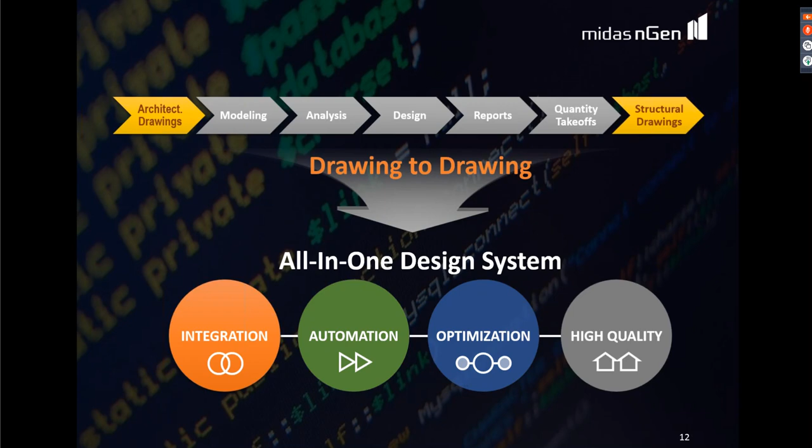Let us look at integration. In terms of integration, modeling, loading, analysis, design, and output are all integrated into one software solution. There is easy and fast CAD-based modeling method. We can have auto generation of specialized loads. There can be multiple analysis cases for a single model file, and multiple design cases can be applied in the single model file. Output generations are in 3 types: Word file, Excel sheet, and DWG file format.

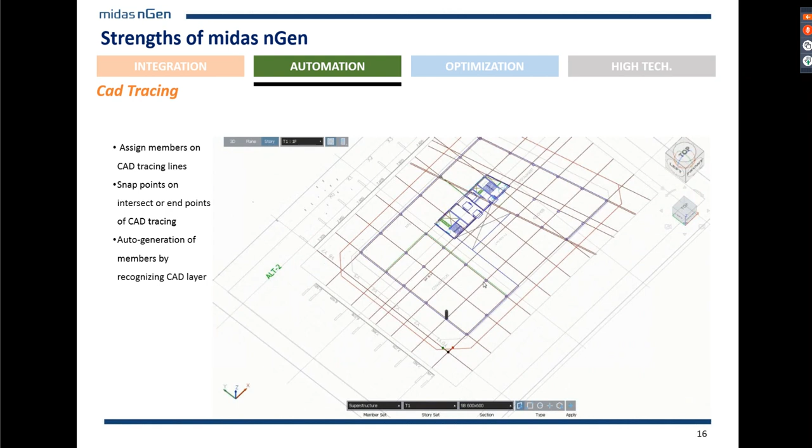Let's look at some automated functions in midas nGen Software Solution, starting with the modeling functions. We have seen this feature yesterday as well, the tracing feature, wherein you do not need to define the section properties of the columns. Just drag around the entire plan and you'll get all the section properties and thicknesses automatically detected by the program.

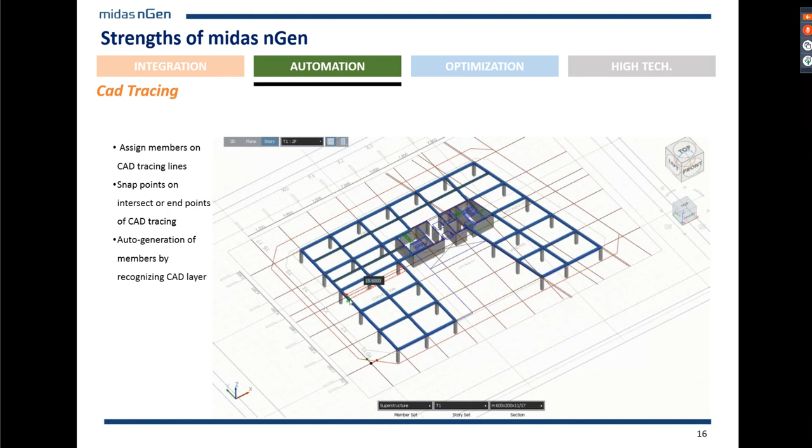You can also use the centerline plan or center lines to locate the beams at a particular story. You can even do easy modeling using coordinates or snapping tools. You can detect the entire floor plan for the slabs, simply select the unrequired slabs and delete them. That's about how you can create your columns, beams, shear walls, and slabs very easily in midas nGen tracing.

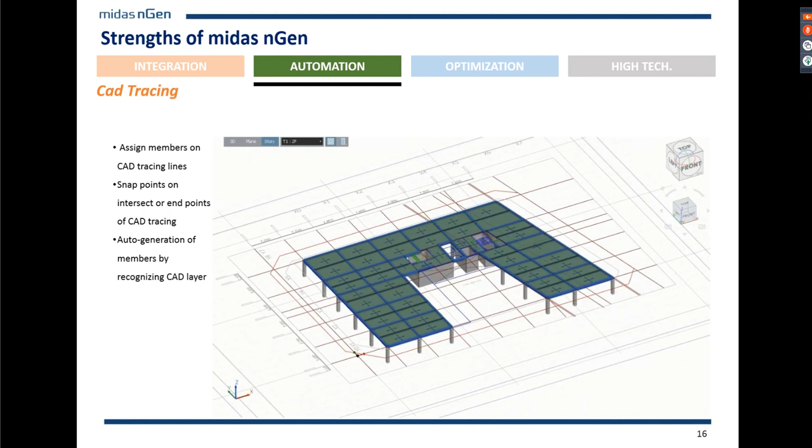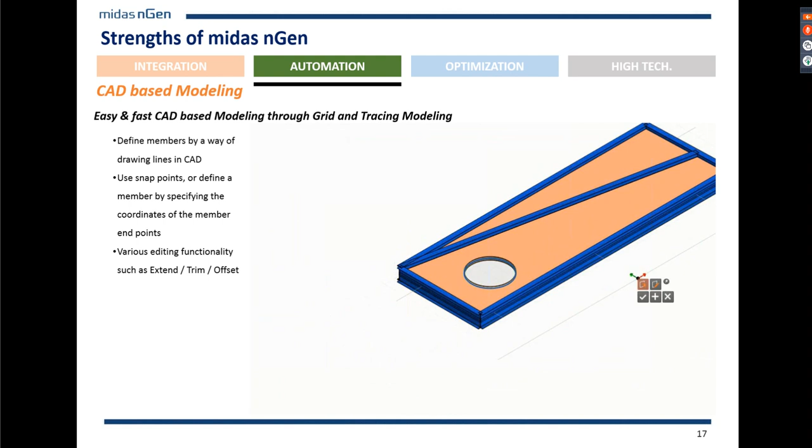There are some editing tools as well available, like you can move very easily, copy, stretch or reduce, extend, trim. You can also have various shapes of openings generated very easily by simply sketching them. You can have irregular shaped bodies modeled very easily using functions like sweep, revolution, or even a trim option.

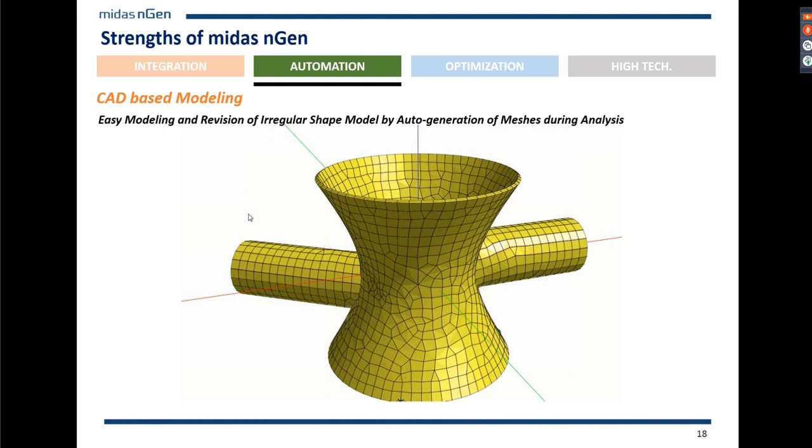In midas nGen, we have an auto mesh feature, so you can actually have any shape or size of meshing as required.

All types of foundations can be modeled in midas nGen software. You can have strip footings below walls, isolated footings. You can also have basement walls and apply earth pressure easily to them. Then footing girders, as in you can assign soil spring supports to the footing girders, like plinth beams and pedestals as well.

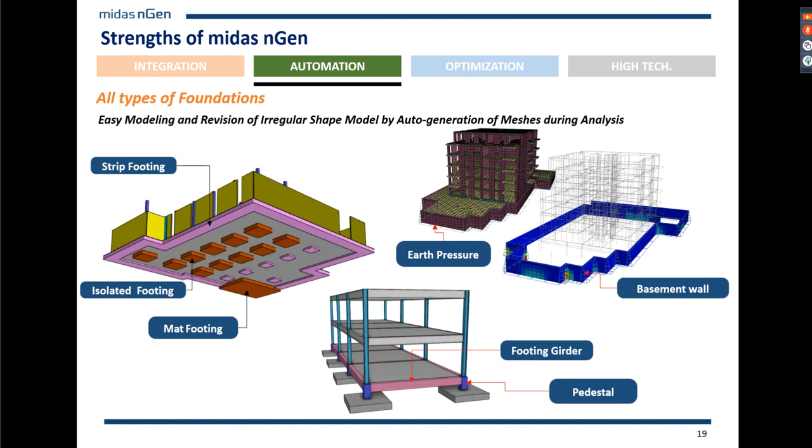You can also have pile supports modeled in midas nGen. And that's about the automation in the modeling part.

So let us start with midas nGen software solution. We'll open midas nGen and look at how we can do the modeling of our steel structure in today's session. I'm going to have a very fast solution over here for drawing the truss, and that's by importing.

We have the import DWG or DXF option, wherein you can import a 3D truss or even a 2D truss. I'm going to import a 3D truss over here. Okay, this comes in fit. All right, and I'll click on OK. So we have a 3D truss modeled over here by simply importing from a DWG file.

Now I'll simply convert this sketch, which I imported from the DXF file, into members. For that, I can go to this body tab and use convert into member. I can select the lines which I want to convert into members. For example, this bottom chord, I can convert it into a beam having section property of C 152x76 by selecting the property.

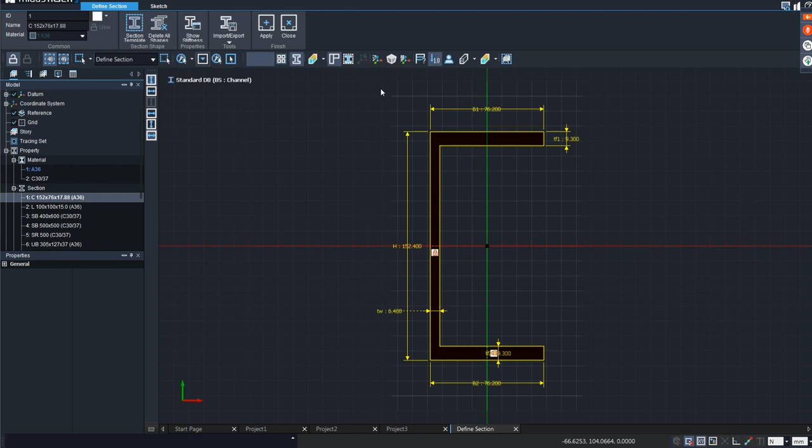So here we're using British Standard, so you can select from here the grade of steel, and you can also edit the section properties. You can say modify and come to a location wherein you can draw any shape of your choice for section properties. So here I have this section property, and if I want, I can just simply select everything and delete.

Then I can go for section template, steel type, and here I can select AISC. We have got several types or shapes available. So if I go for a channel section, I have again a huge database of different types of channel sections or C sections. So I can basically select from here and say insert template. So here I have the template to be inserted, and then I can just say apply and close.

So in this way I can have my section properties modified, and this would be applicable for everything. And you can also add your own section properties. Okay, so that's one part.

Next, I'll also go ahead and use some polygonal selection type, so that I can select my members, my line elements, easily to convert them into members. I can select the type of the property. Then I can also have brace type of members generated, let's say angle section. So I'll use again a pick selection, make a box, and make the selection easily and click on apply. So this is how we can actually create the entire model.

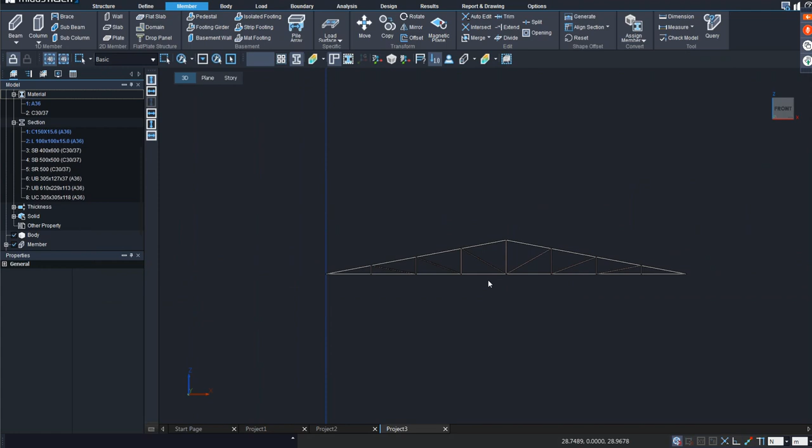Okay, just let me check with the dimensions while importing if I've correctly done that. It's 8 meters, seems to be too big. That says 64 meters. Okay, let me just undo this import. Sorry. We have several importing functions as well available. Okay, this seems to be fine.

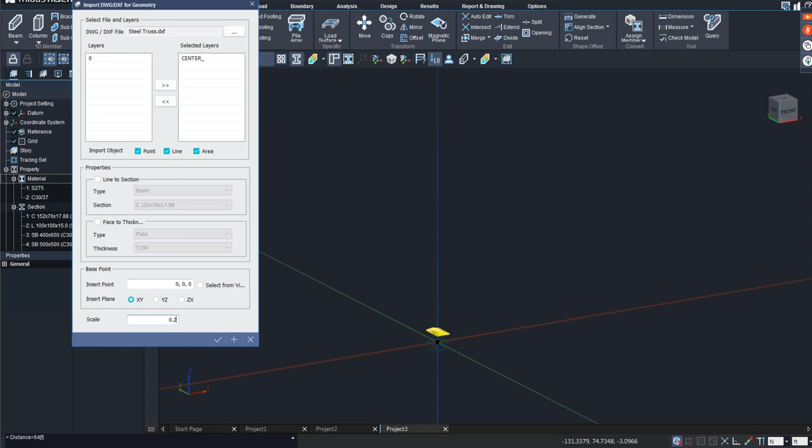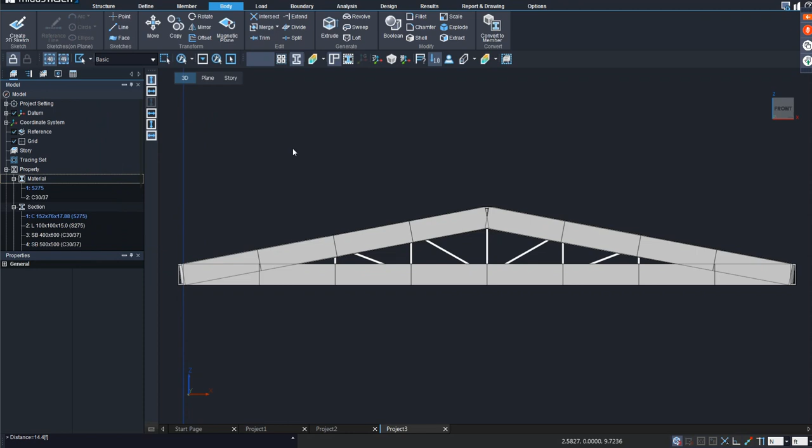No. I'll make it smaller. Okay, 14.4 meters. All right, so I'll go ahead and convert these body elements into members. Let me do that. I'll select everything at once to make it quick. Yeah, C section. Oh, sorry. 64 feet was fine.

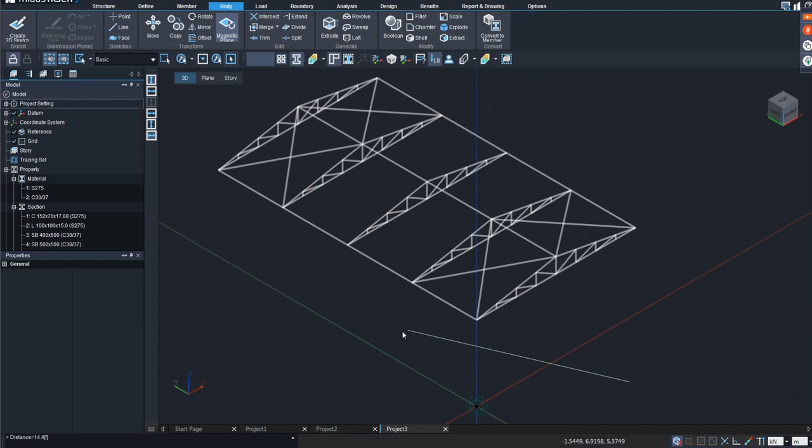Sorry, I got confused with the feet and meters. I'll just start all over again. Sorry for that. Okay, so this is supposed to be one time itself. This is correct. Get it back to meters for no more confusion. Okay, so the unit system can be modified at any point of time. I'll go ahead with the selection.

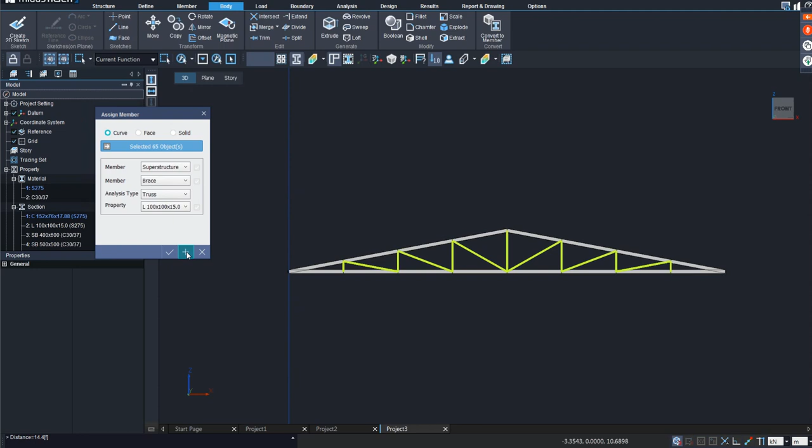And angle section for the braces. This is how the color difference would be if we choose the correct type of members.

So that's one thing. Now, one more thing is that even these would be our trusses, so you can actually select these. These are converted into members, or these are lines itself, so you can convert them as well into braces. Select the brace like this and click on apply. This is done.

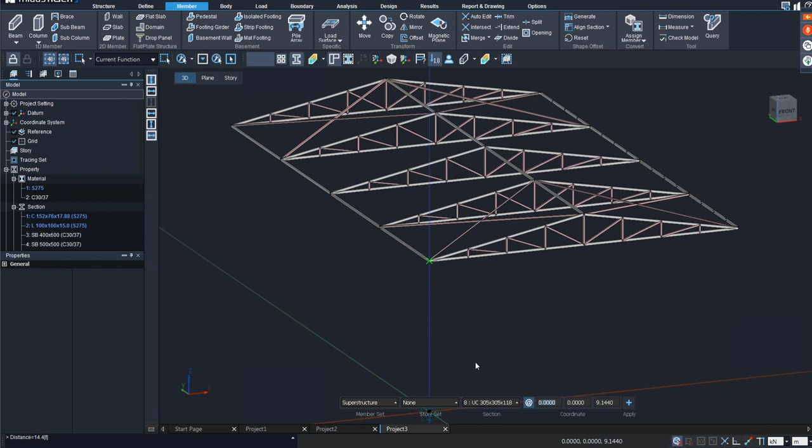Then we will go ahead to draw our column members below this, and it's easy. Just click on column over here. It's like CAD type of modeling itself. You can select the section property and can draw it by clicking. I'll make it using F8 to make it straight, and I'll click over here.

And further we can go ahead, copy this element or member into a direction. You can even click by 2 points wherever you want.

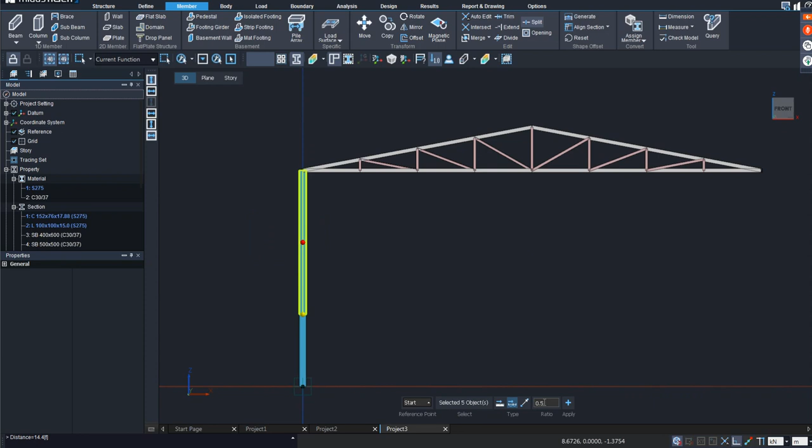Then further, let's look at some more editing tools, like I would like to divide this into parts. I can split these members into parts by ratio, by 2 points, or by distance. There are different options available. I'll go ahead with by ratio, and have 1/3 division of this member. And I'll select this and have 0.5, or half of it will be divided again.

And further, I can go ahead create my beams. For the beams, I'll select the section, let's say UC 305 by 305. Just like we have in AutoCAD, we can snap on to the ends, to the nearest point, to the center, and so on. And further, I've got some truss members as well.

So I'll go ahead using the brace type of member. Here we have got several types of analysis types of members, like elements. So for brace type of design, we can have beam type of element as well, or compression only, tension only type of elements are also available, and truss type of element is also available.

So we can choose, and we can choose a section property, and I'm going to create some truss members over here.

I think my intersect command was not on from here, that's why it did not get intersected. No worries, we can still go ahead and use this intersect command, and we can select all of this and click on apply.

I'll get back to my braces so that my center point will be located nicely. Right, so here it is. So you can just go on drawing easily. If any incorrect location is selected, you can press undo. There is a right click command also to come out of the command line, and so on.

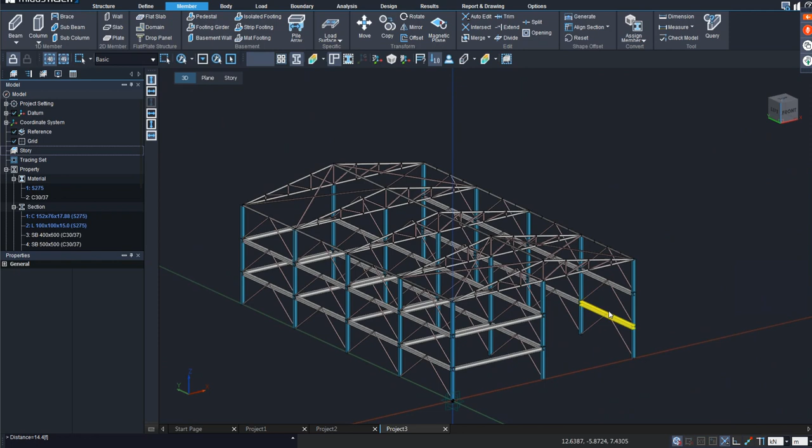And further, if we have got the slabs at these locations, you can actually use the option. I'll save this project. So you can click on the periphery elements, and you can see the slabs over here, and you can actually click on apply. So you've got your slabs also generated.

You can also create your roofing elements at the top if you want. If you don't want, you can actually use your floor loads command to apply the loads on the beams. You can model the purlins if you want to, that's also an option available. So here I'm going to show the floor load command as well.

For that, we'll move ahead to the loadings now. And in the loadings, we'll go with the self weight firstly, and then we will go ahead with certain more options. We have got point load, beam load, pressure load option, temperature can be applied to the structure, displacement, arbitrary loads. These options we also saw yesterday, and we also tried to apply slab load onto the locations where there are slabs. So same thing can be done over here.

We can apply the slab load type, live load and dead load at once. So let's assume this is an industrial shed, and there is a higher floor finish of maybe 3 kilonewton per meter square, and a live load of, let's say, 2.5 kilonewton per meter square. Of course, it will vary as per the requirements.

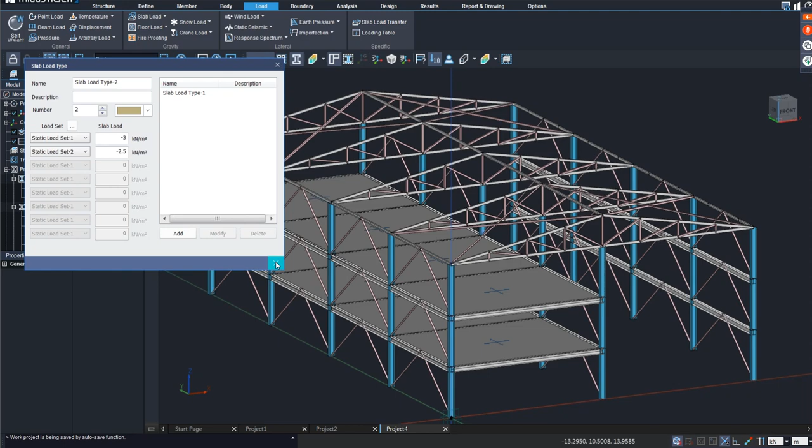I'll apply the slab loading on the slabs. I can simply do the selection this way and apply. So slab loads have got applied. Now we can apply the floor loads.

We'll go to the floor load type and assign roof loading. You can give a name like roof, and provide the loading information like the purlin, and also specify the weight of the purlin and the roofing. Let's say 0.5, and some static load or live load. If there is going to be any live load on the roof, that also can be specified. Important part is to provide a negative sign. So likewise, you can specify the weight, and then start the loading.

So here we have the load command. We can go for the one-way type, and to include the purlins, we have got the option. Just let me apply the floor load first and add the locations.

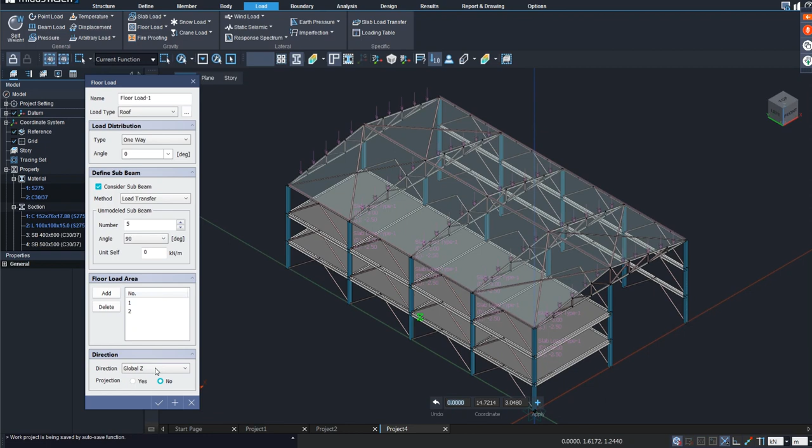You can go for a 90-degree angle or a 0-degree angle. I'm going for 90-degree because this is how I want the purlins to apply the load on these top chords. The same thing I'll do for the other side. I'll start from the smaller direction and then the longer side, and click on apply. So I've got both areas on which I want the roof loading applied, and then I'll click OK. Roof loading has got applied, and the purlin point loads are also considered on the top chord beam members of the roof.

So that's about the loading. I'm sorry, I think I missed one modeling part, the pedestals and isolated footing. So foundation is not modeled yet. Let me go back to the member and show you how we can easily model pedestals and footing girders, and we have isolated footings as well. We'll see all these three options.

When it comes to pedestals, you can specify the height of the pedestal - 1 meter, 1.5 meter, or anyhow - and the section size. All you have to do is simply select the columns below which the pedestals are to be created. So you can see these are the pedestals. I'll click on apply, and we have got our pedestals generated.

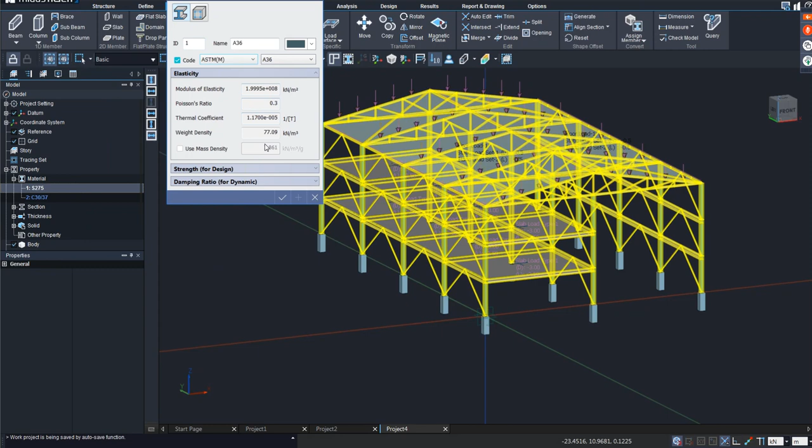Below the pedestals, we can go ahead and have isolated footings in the same way. Here you can specify the thickness - I'll add a thickness of, okay, we'll change the grade of concrete. Thickness is 0.5, let's say. Click OK. Let's change the material properties by simply modifying it. I'll use British Standard A36, for example, and British Standard for Concrete, let's say grade C3500.

So this is what I've done, and I'm creating my isolated footings with a thickness of T500, and we have different analysis methods for the isolated foundation - rigid method or FEA method. Both methods are applicable here. Now I'm selecting the FEA method for now, and we will select these pedestals below which we want our isolated footings. I need to specify the length and breadth, and then we can just click on apply. So we have got our pedestals, isolated footings, and footing girders also we can have.

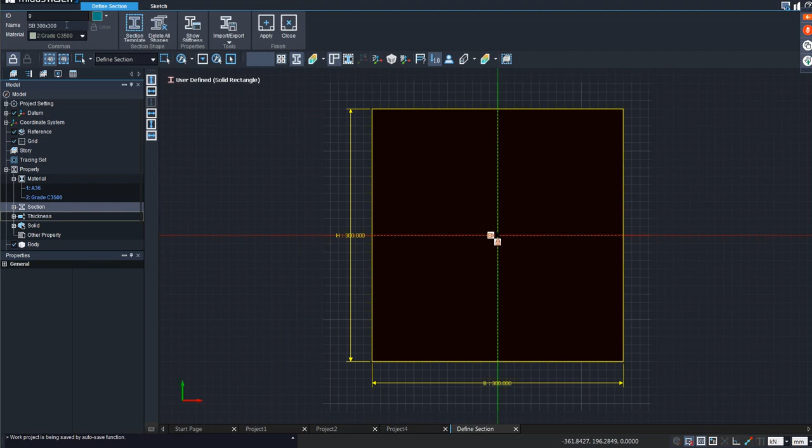Let me add a section property for the footing girder. I'm adding a simple section property of 300 by 300 for the footing girder, and I'll just click apply and close, and then go ahead to do the footing girder modeling.

So here I can select the section property I just created, and we can just go ahead and select the two locations between which we want our footing girder. So it's like a combined footing you can have for this type of member - footing girder, or maybe if you use it for plinth beams, you can use it for plinth beams as well. So I'm using it for footing girder itself, and then I'll click.

I mean, height starts from the bottom. So it starts from the bottom. If you want to move it up, you can - there are options available. I'll keep the height as the bottom itself where our isolated footing is. So these are different options available.

So I'll click on apply over here, and you can see this is how it will look like. Okay, so the same thing can be applied at all these locations. So I'll be definitely providing this information one by one. We can also do it for the last and the first, and then we can see how we can create the intersect command for dividing the beams into several parts.

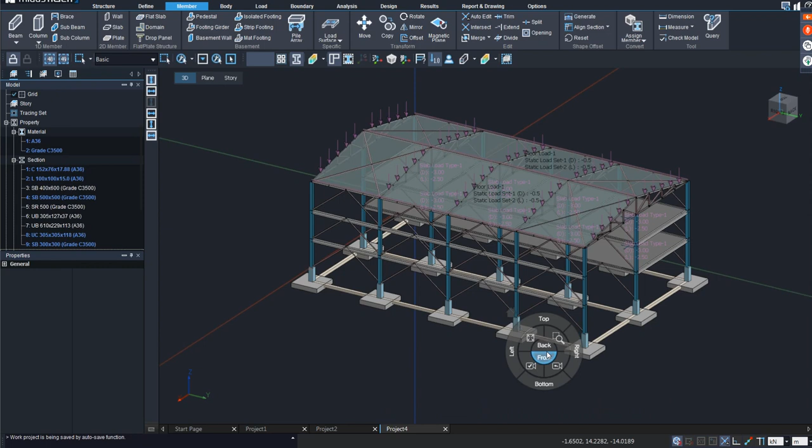So I'll just select it like this, and then I'll intersect later on. Okay, and the same thing can be applied. Okay, I'll use my intersect command over here right now. So we have intersect, select all of this and apply. So we have successfully intersected our beams. So basically you can choose to create different types of members for the steel project.

Okay, so after this is done, we will go ahead now to the boundary conditions for our footings, and we will provide the soil support. So here I'll be assigning soil support information. Yeah, soil support information. So we have got user-defined type of soil spring property definition, or you can have usage of Joseph E. Bowles.

So you can use Joseph E. Bowles as well. And then you can use either linear elastic or compression only type - those options are also available. If you're using Joseph E. Bowles, you have over here the options to select the soil stress, provide the soil stress information, the allowable one. So I'll provide over here, let's say, 200 kilonewton per meter square. And then...

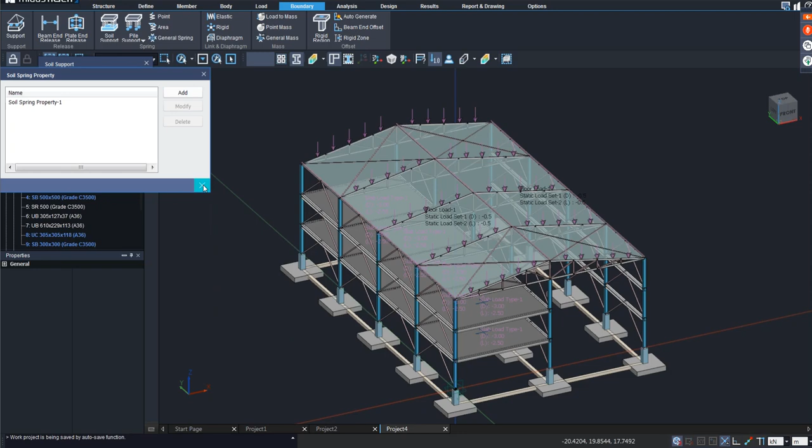So I'll click on OK and close, and I'll select all my isolated footings, and I'll click on OK. So I've applied the soil spring supports to the foundation, and now we can move ahead to the next part, that is the analysis.

Now before I move ahead with the analysis, let me generate some story data information so that we will get our drawings generated. So I'll have this automatic generation of story data, and I'll click on OK over here. So we have got the story data information.

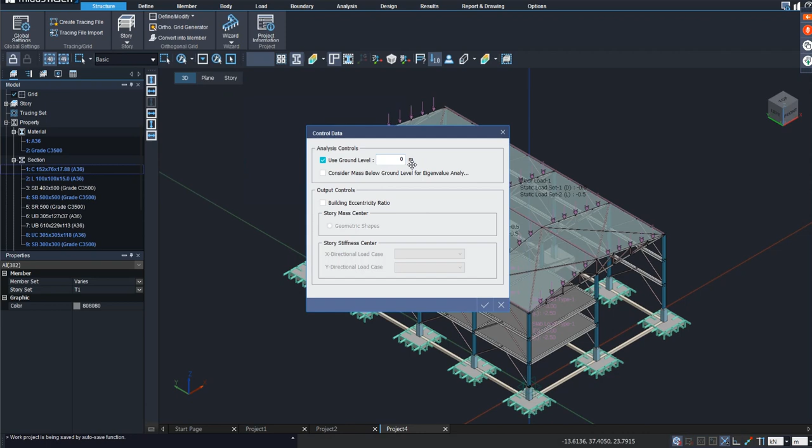Automatically it has detected the basement or the foundation information. So from 0 level to minus 1.5 level, it is B1F and B2F likewise. Okay, so that's how we can understand. If we want the program to utilize the control data as the ground level, basically, as we want, let's say 0 is exactly the ground level, and then we can go ahead with the auto generation of story data and click on OK. So likewise it will again detect if at all you have not used 0 as your ground F level, then you can use any other level as your ground level.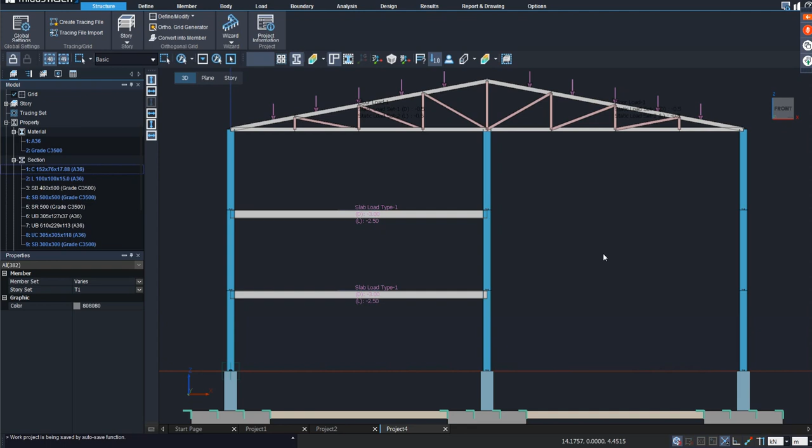Okay, now there's several story definitions that it has detected. So instead of all the definitions, we can choose a few, because it has detected the locations for these points as well - the locations where these points are there. So it has detected those levels as well.

So instead of having those points, I'll display the levels over here. Go back to story definition, and let's say from 3F to between the 3F and roof, I don't want the levels, so I can select these levels and delete that data information only. Okay, so now I have only this much information. Okay, we can also extract grid lines out of our structures. So we have auto grid generator wherein I can just simply click on extract, and we can find out what are the levels of the grid lines. This could be useful for the drawing generation as well.

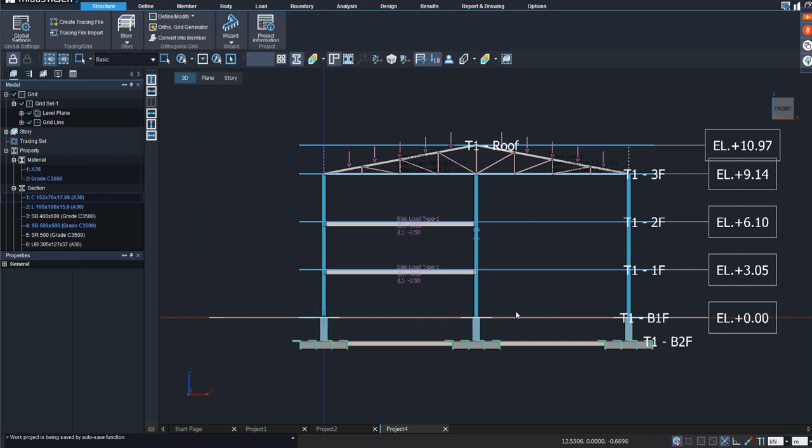Okay, so this is done. Now I'll go ahead for the analysis. In the analysis settings, we have got again the option to choose the meshing and the solver. Combinations, we can choose the steel combination as per the American standard.

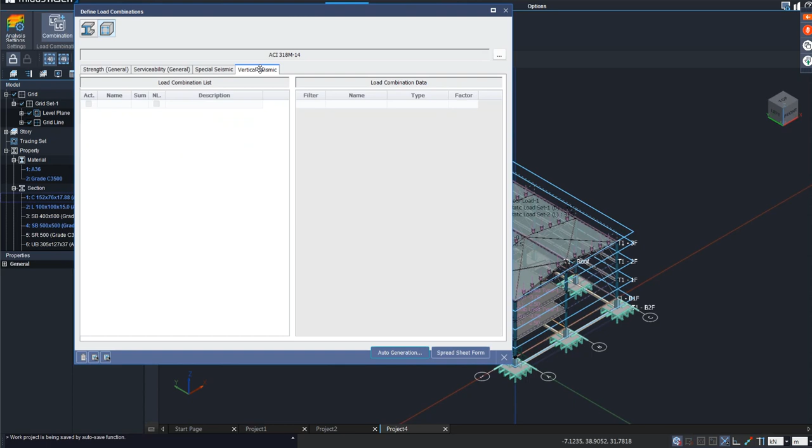So let me select the American standard over here for general, and steel and RC American standard would be used. And we can automatically generate the load combinations, so I'll add that for the steel as well as for the concrete. We can also have our own load combinations, not automatically, as we can manually create our own load combinations. Let's close this. Load combinations are done.

Then further, we have the option to generate the analysis case for design for the superstructure and basement at once, or we can choose separately. And we can choose which boundary conditions we want to utilize, and then the loads that we want to use for the analysis purpose. After the analysis case is defined, we can go ahead for running the analysis. So I'll just run the analysis right now.

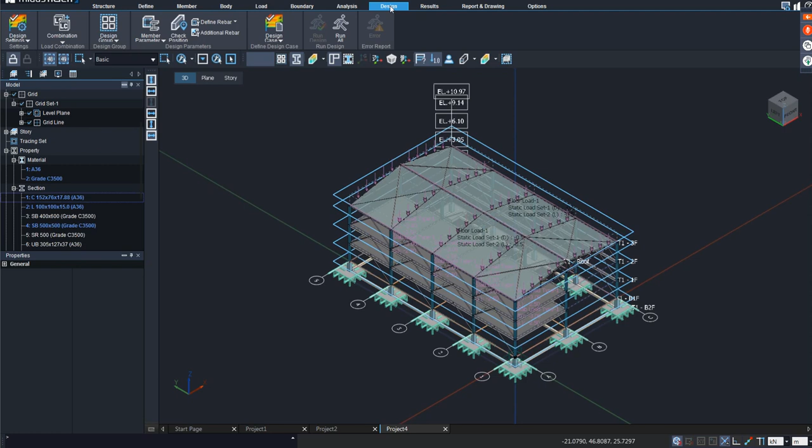Then we can move ahead for the design part. Okay, so before we move ahead for the design part, there were locations where auto constraint was applied. There is a warning over here: one or more non-zero degrees of freedom were auto constrained. So some options were automatically constrained over here.

So we need not worry about that because some elements which were not compatible with the other elements. For example, the 2D elements and the 1D element, if they are not compatible, then the program automatically constrains that degree of freedom. Okay, so that's the warning, and now we can move ahead for the design part.

But before we go to the design, let me show about the results which we can get from here. So we can look at the displacement. Let me hide all the labels, grid lines, and datum tool as well, and we can hide the one way, two way. Okay, so we have our displacement that is displayed right over here.

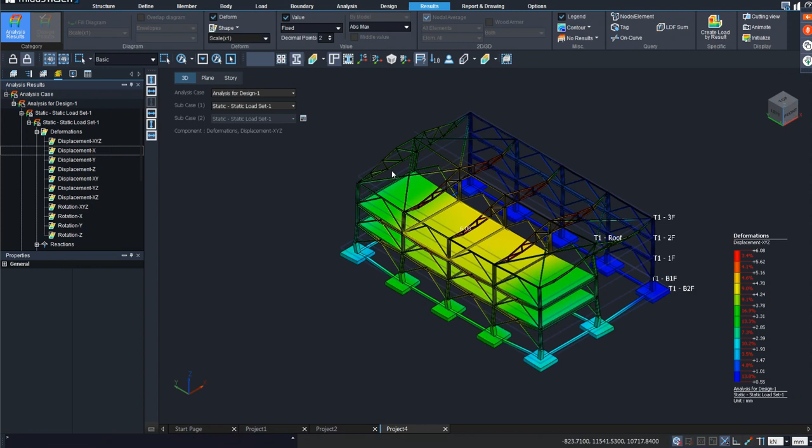We can look at the maximum value. I'll change the unit system to mm. So maximum is 6.08 mm. Then further we can look at the reactions, but these would be at the nodes of our meshed isolated footings.

Okay, let's look at the applied forces. Now, if you're going to be analyzing and designing the foundation separately, then you need the applied forces. So we can actually look at the applied forces at different nodes. I'll undeform this. Okay, so applied forces we can find.

So you can see over here there are some applied forces you can actually take out as a table, and you can use it, or you can even use this create load by results. So it converts the analysis result value into loads, and then you can utilize it for performing the analysis and design separately of the foundation. Okay, so that's about applied forces.

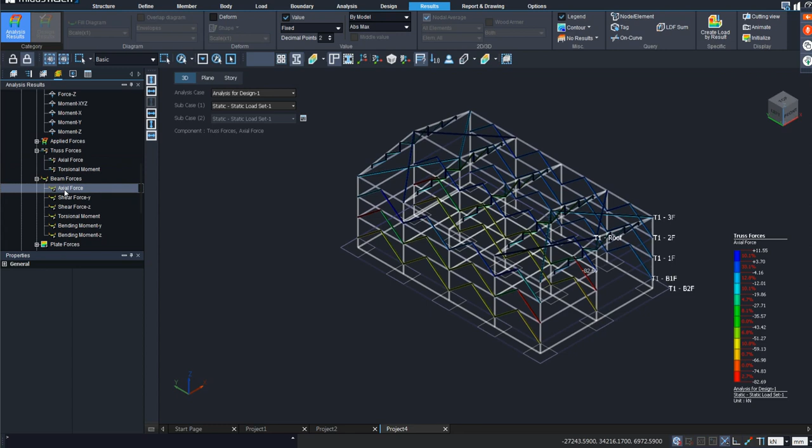Then for truss members, we can see the truss axial force, torsional moment if there is any, then axial force basically for our truss members. We can see that over here. And further for beam forces and moments, again, the axial forces predominantly for the columns. And we can look at the bending moments as well, so we have this bending moment diagram for our column, for our beams and columns both.

You can choose to view the results by plane or by story. So both options are available. So that's one part. Now I'll move back to the 3D and we'll see everything over here. That's about the beam forces and moments.

And wherever there are plate elements like our isolated footings, because we use finite element analysis method for the isolated footings, we can see the actual forces and so on. And after that, we can see over here the pressure value as well, so pressure Z value, we'll change the unit system to Newton mm, kilonewton meter.

Yeah, so it's 88.46 is the maximum one for only the self-weight. But if we go for the combination, then we can see the results. It's 123.85 for the first load combination. So that's about the subgrade stress, I mean the pressure.

And then further, we can look at the plate stresses, beam stresses, truss stresses, forces, beam forces, and so on. So that's what we saw in the form of image or display on the workspace. We can also get all these results in the form of tables. We also have got story irregularity tables available, like story drift, story displacement, story shear force coefficient, and stability coefficient. There is stiffness irregularity checks and so on. So all these tables are available in Midas nGen software. Now we will move ahead to the design part.

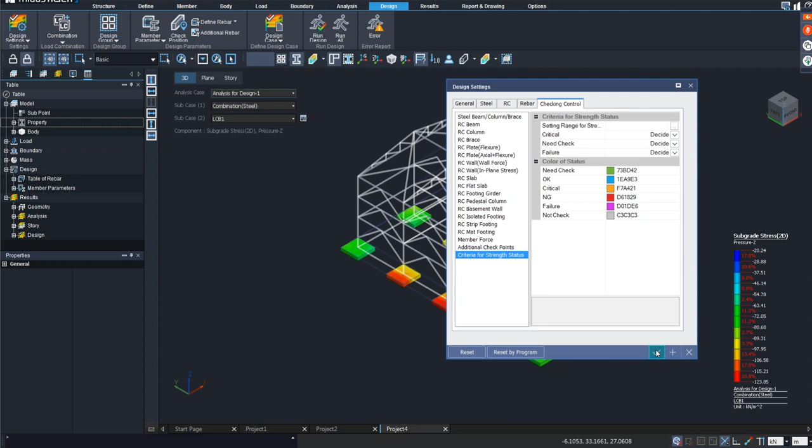That's about how the design settings can be controlled. Combinations already created, and design groups - sorry, not load groups, design groups - would also be automatically generated by the program.

Let me show this. Basically we are taking care of the floor levels, the section shapes, section sizes, and the lengths as well. So all these groups are created.

You can also manually create your own group. Then further, there are some specialized member parameters wherein you can select which all members shall have certain effective length, unbraced length, and so on. You can specify that manually.

When it comes to RC structures, you can actually provide your own reinforcement arrangement. Let me initialize the structure and hide the labels. And further, we'll create a design case.

We can have multiple design cases generated, and those will include both steel and RC. So at the same time, I can run both steel and RC. For RC, I can choose rebar auto arrangement, and I can choose the different diameters of bars that it should select for the design. So I'm going to perform the design right now.

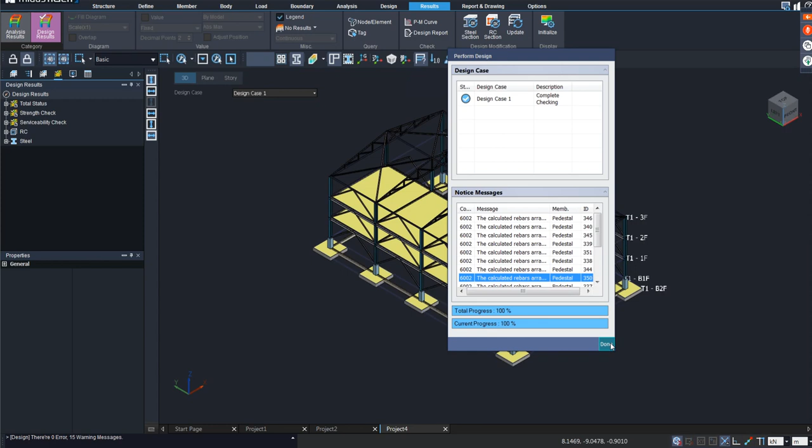The reinforcement requirement is pretty less supposedly, and it is for the pedestal type of members. So you can actually choose to assign your own reinforcements to satisfy this minimum rebar criteria. Okay, so this is one part.

We can actually see the information about our pedestals from here. So this is our pedestal, and the status is okay - I mean it is passing, no problem, but the rebar ratio is not satisfied yet. So we need to actually take care of that part.

Maybe minimum required spacing and minimum required reinforcement shall be applied to the pedestals. You can do the modification over here, and you can go ahead with the design and check. So that's about the pedestals.

Let's go ahead to the total status check - strength check, not the strength, the total status. Basically, it will show if any member is passing or failing in either strength or serviceability conditions.

So we can see that there are some members which need check, meaning they are highly uneconomical. Blue colors indicate that those members are economical within the specified demand capacity ratio limits. Then there are some critical isolated footings which are orange in color, and some trusses which are also orange.

We can see that there are some members which have failed. Some isolated footings and footing girders are also failed, and we can find out the reason for these failures. One way is by going to the steel section and understanding from here why certain members are failing.

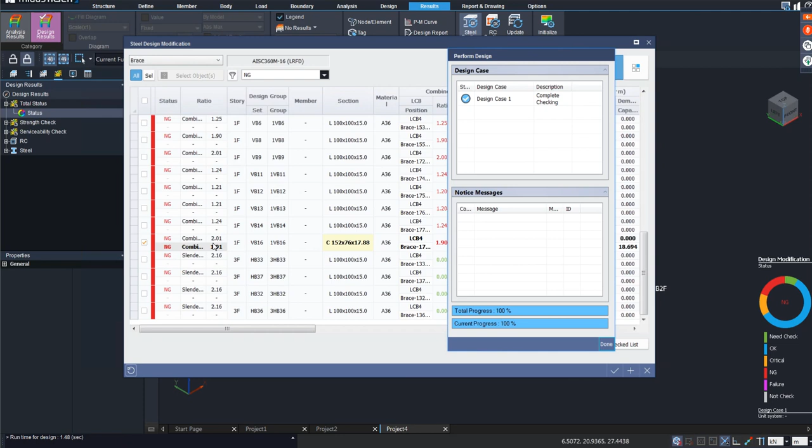Let's say I'm making an example by selecting a C section over here. If you select another section property and run this redesign for checked list criteria, you can see that the ratio has reduced a little bit, but it has not satisfied completely. So these are different ways in which you can check for different section sizes.

After you're done with the modification of your design, you can click update so that the reinforcement arrangement or section sizes for the entire structure will get modified. Then you can go ahead and run the analysis and design again.

One more result I would like to show is how we can get the report generated. We have our beams, truss members, column members, pedestal, isolated footing, and also footing girder. You can select all these and get a summary report - it's a Word file report generated by the program.

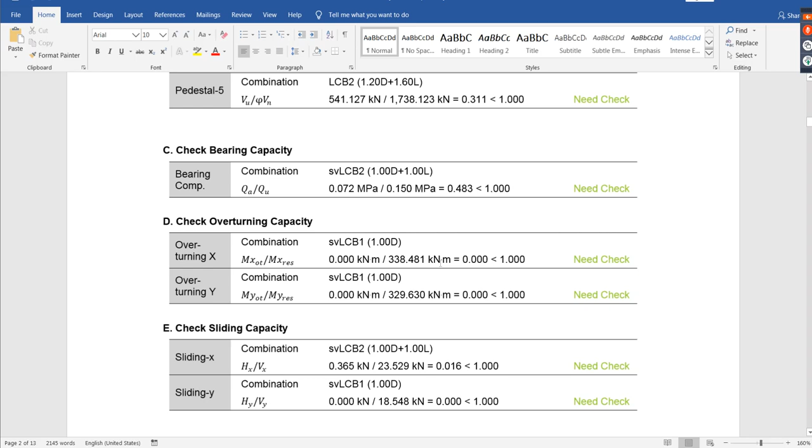This is for the isolated footing. We will be able to see that the program has checked for the two-way shear capacity as well as overturning capacity and sliding capacity.

This is for our footing girder. It has checked and is failing in shear - the particular selected member was failing in shear.

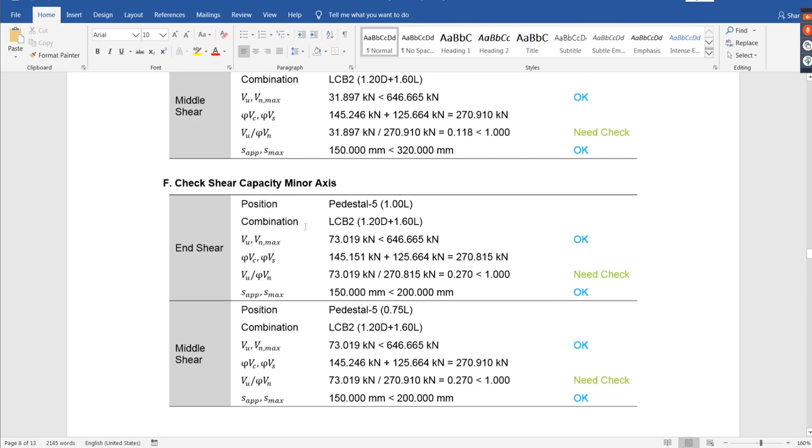This was for the pedestal, and pedestals are passing. Then we have the steel beam member, and we'll be able to get this information - slenderness ratio check would be done, shear capacity, deflection check, and fatigue check is given.

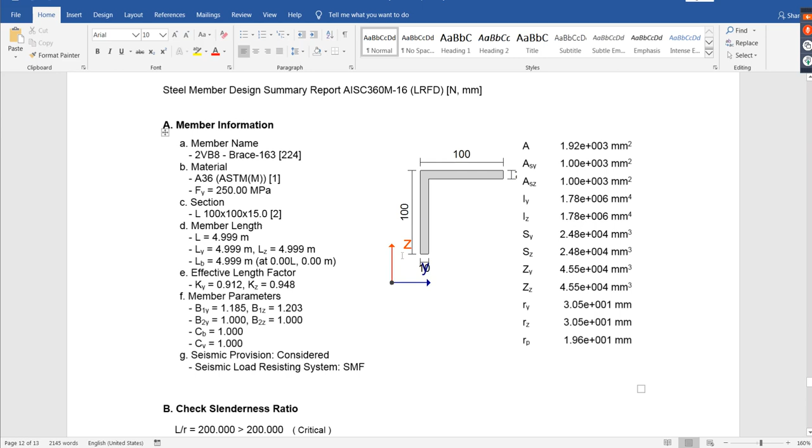Then for the column, the same thing is applicable. We can also get detailed information about the design that has been performed by the program.

If I go for the design report, I'll select one steel column over here and click OK to show how the report would look like. Wait, I did not select detail - let me select detail and select one column and OK.

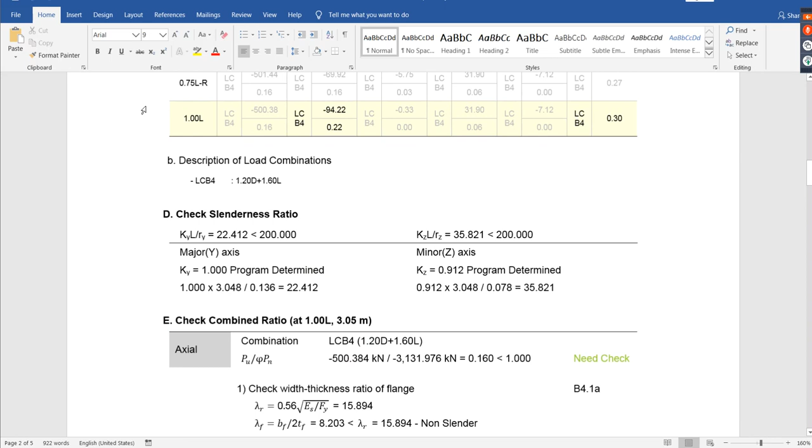Here is our detailed report generated, where we can see which load combination has been used and at what part it has been used. Then the ratio limit is checked, slenderness ratio, and the combined ratio check. It'll check with the moments, axial and shear capacities, and deflection check would also be provided.

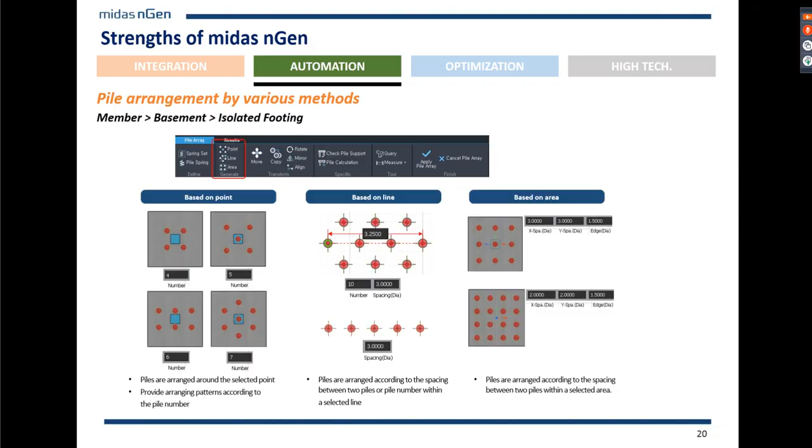I'll go back to the presentation and we'll look at some more automations in the loading part.

When it comes to loading, yesterday we had seen that wind loads can be automatically generated by the program for the building type of structure, and we also saw that there is an enclosed structure option as well. For our structure, we can assign the windward, leeward, roof, and so on, all the areas where the wind load is going to get applied, with auto calculation of the pressure coefficients, internal pressure coefficients, external pressure coefficients, roof pressure coefficients, and so on.

So that's one thing. Then seismic loads, lateral loads can also be automatically assigned and calculated by the selected code.

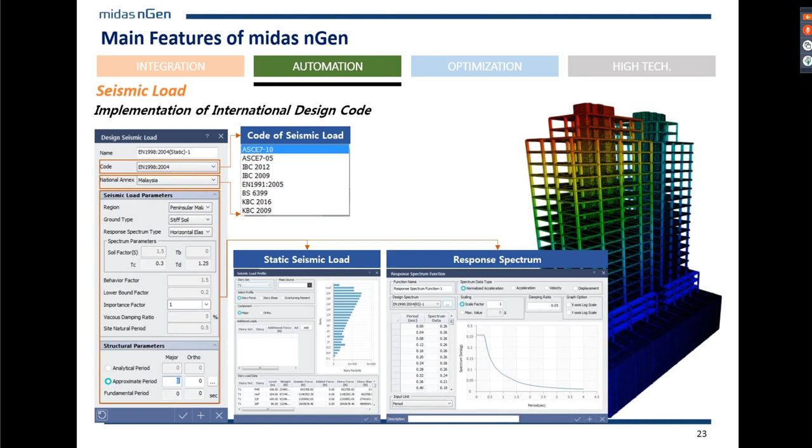And for optimization, well, yesterday we saw that we can assign shape offsets to the program, and also consider the rigid zone of the location between the beam and column.

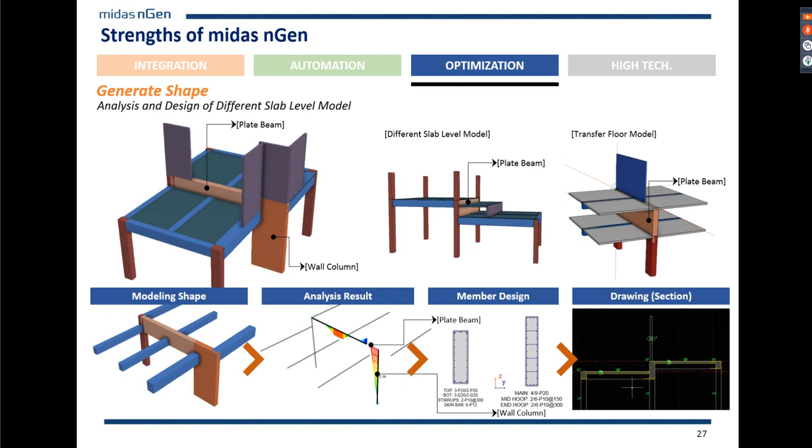Then further, there is a plate beam and wall column type of members available for defining drop slabs or beams located at either end of the walls. So those will be generated as beam elements and column elements respectively.

The design codes available or applicable in midas nGen are as per European, American, British, and Korean standards. We have seen how the American standard could be applied today.

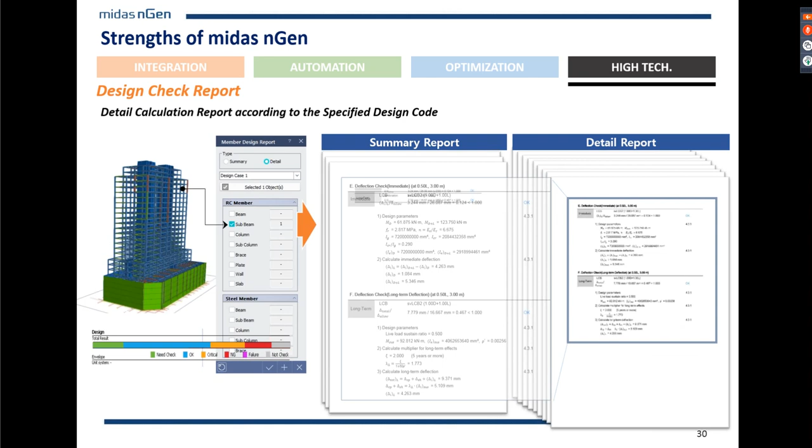And now we are looking at the high quality report generation. So we saw that there is a summary report that can be generated, and detailed reports also generated by the program in the form of a Word file. The good part is that you can see all the formulae as per the code and the subclause numbers as well. So in case you have a doubt where a particular formula came from, you've got the subclause number which you can readily refer.

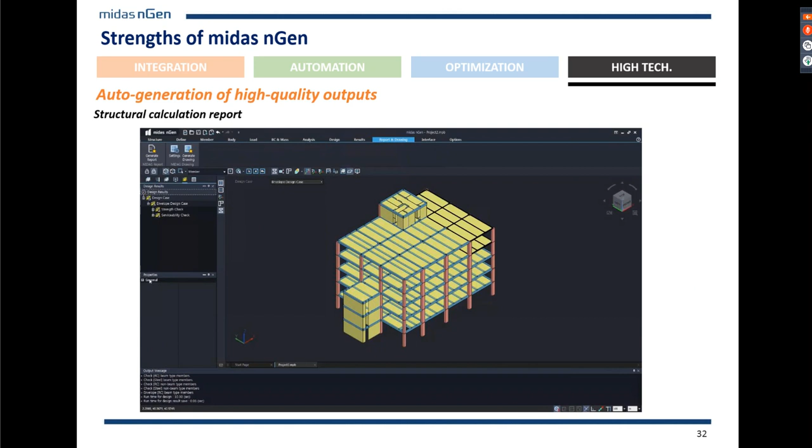Then further, we have got the high-tech report generation using a report maker. This is a small video I had played yesterday as well, but for those who have joined newly, let me tell you that we can provide the inputs and outputs as we want, completely under our control, into a location where the entire project report can be generated by simply one click. So you specify the information in this location and you can make a template out of it, which you can use for all your future projects. You can actually control the font size, the colors, and the information, or even the images that you would like to input. So everything is under the user's control.

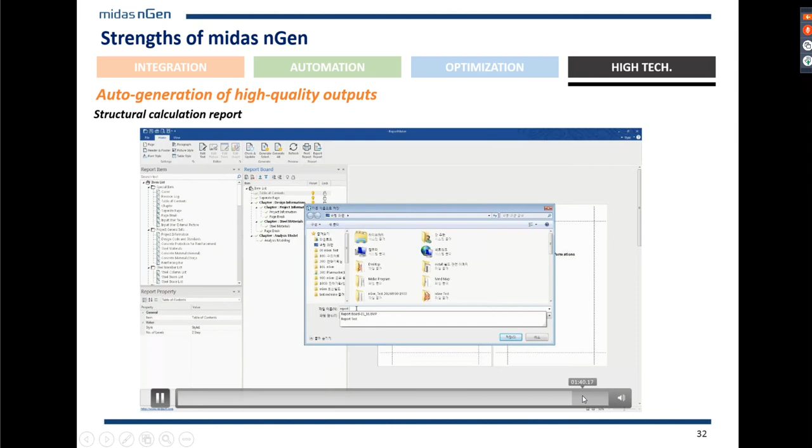And further, you can actually take this into a Word file, so that's how you'll get the entire project report generated. You can save that template and open it for all your future projects. So maybe once you spend some time creating your template, you can use it in future for all your project reports. That's about our report maker in midas nGen.

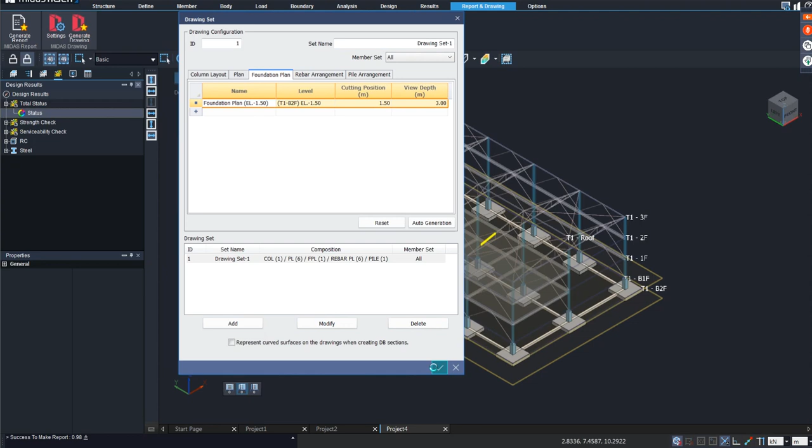Now I would like to also show you how drawings can be generated in the Midas nGen software solution. I'll just go to the settings. First of all, here we have the foundation plan. We can see this foundation plan right over here, and this is our drawing set 1. You can have several drawing sets as required. You can click on OK and save this information.

Then we can go ahead to generate the drawings. Midas drawing comes along with the Midas nGen software solution, and the design results from midas nGen will be imported into Midas drawing directly right now, and then we will see how the drawings can be created. First, let's look at the structural design overview, where the program simply specifies which codes have been used for the material, for the design purpose, and what is the name of the project, and so on.

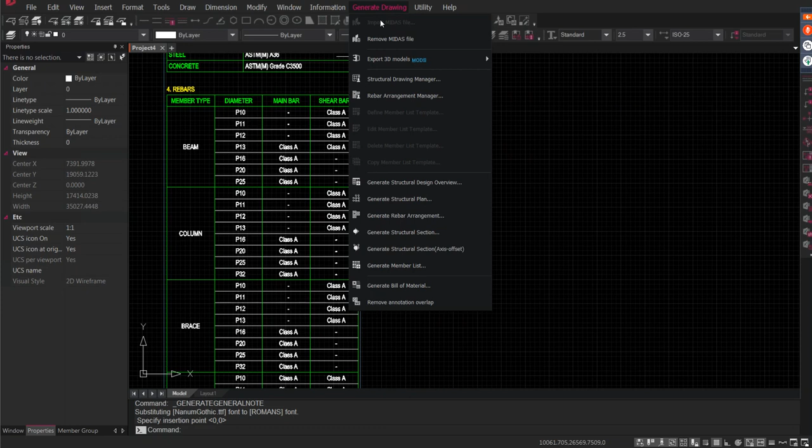This is similar to AutoCAD, so you can actually use all the commands of AutoCAD. Now let's look at some more information. You can also get the structural plans created, so there is a column layout that can be generated from the program. Right now you can see the program is collecting all the information from the midas nGen file, and finally it will easily generate all the drawings one by one. As in, when we select, we don't need to wait for the time which is required right now for collecting all the drawings.

Midas drawing is also capable of creating the structural plans and structural sections as well. So let's see all that. Here I'm placing the column layout.

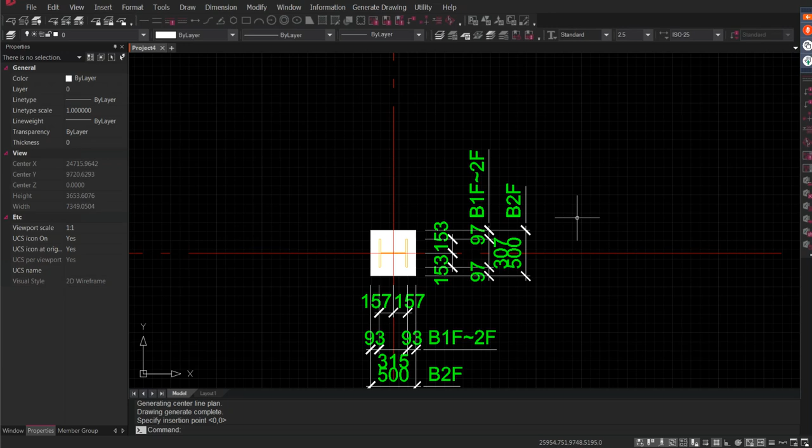So this is the column layout. You can see the column size and the pedestal size as well. This information is provided here, and we can see the column list - what is the size and shape, and the pedestal size and material used for it.

Further, the structural plans and floor plans - you can choose different floor plans. At the bottom, there's a line indicating how much time it takes to create a particular drawing. This floor plan shows the slab and the section for the beams right here. One is G1 - the group names are specified in the structure plan, and the section sizes are specified in table format.

That's how the section looks, and that's how the plan looks. We can also generate structural sections. So I'll create section 1 over here, make a section through this, and specify its direction.

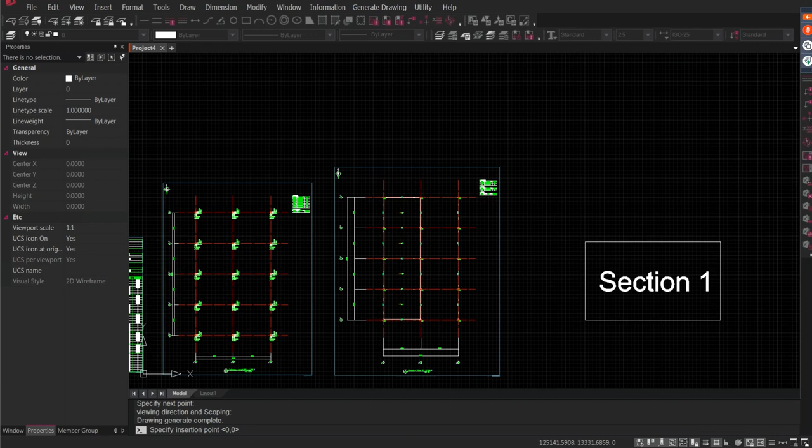So here we can see what the sizes of our beams are. The place where I cut, it shows only that much part. So if I go ahead and make another section, I provide a name for it, and I'm creating a section that goes through this.

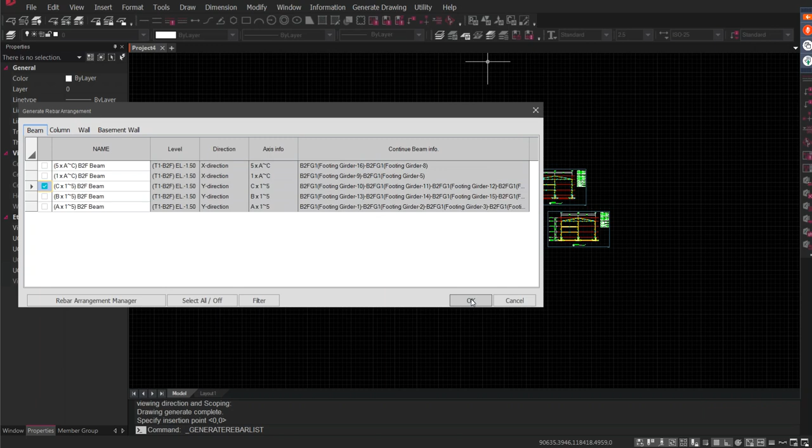We can create several sections this way, and also get the general rebar generation for our beams. This would be a footing girder. For the footing girder as well, we can get the bar bending schedule, the reinforcement arrangement, the stirrup arrangement - all that information. This is the bar bending schedule, the location of our footing girder, and the reinforcement arrangement for it.

Let's look at more rebar arrangements for beams. We'll move ahead to the next part, the generate member list. Here we will get information for pedestals, isolated footings, and the list of slabs as well.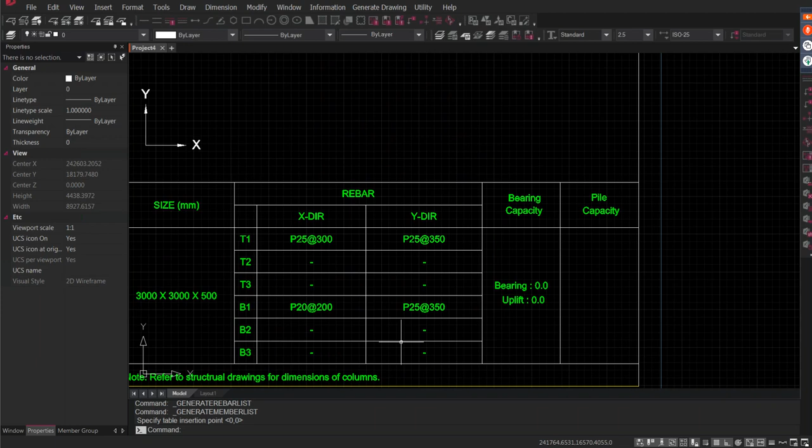So I place it over here - this is for our isolated footing. We'll get a typical drawing showing the reinforcement arrangement for the top and bottom. We can have 3 layers - up to 3 layers of reinforcement applied to the isolated footing.

Then we have information for our pedestal. Only one type of pedestal is there, one group only. For that, we can see what the reinforcement arrangement is, the main reinforcements, number of main reinforcements, and so on.

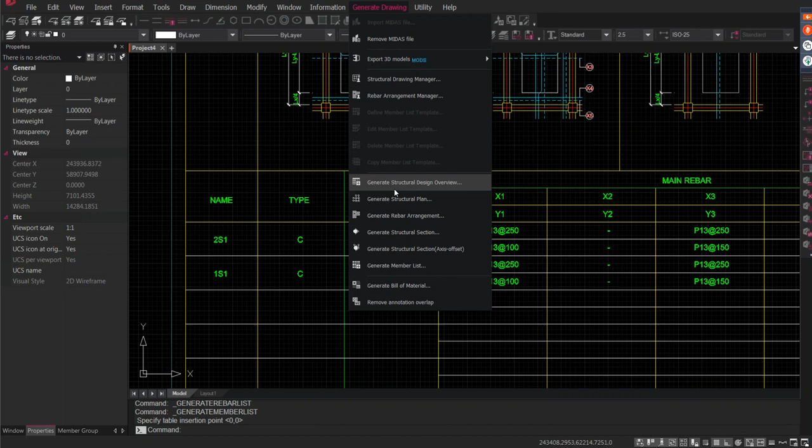Then this is about the slab list. You can get typical types of drawings for the slab, and we'll see the type here. Let me check - yeah, we can get the slab reinforcement details here as well.

So we have got slabs on the 2F level. The slab reinforcement, and this is how the slab reinforcement would look like. This is the indication of the reinforcement for the slabs.

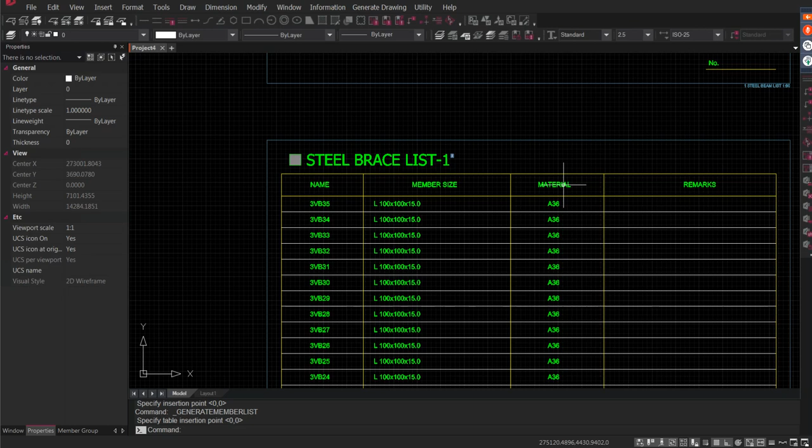And for the steel as well, we can get the result in the form of tables. We have the name of our member, the size of the member, and material property used for it. So that's about the list.

Lastly, we can also generate a bill of material for our RC as well as steel members. I'll click OK, and there will be an Excel sheet generating the bill of material for our entire structure.

It will include the reinforcement information, the weight of the rebars, the volume of concrete, and also the weight of the steel and the painting area. So all that information we can get in the form of an Excel sheet.

At the bottom, you can see it's right now on 36%, so we'll just wait for it to generate. And by the time it's generating, let me take you back to the presentation.

So we saw that Midas nGen is also capable of generating structural plans, elevations, and drawings.

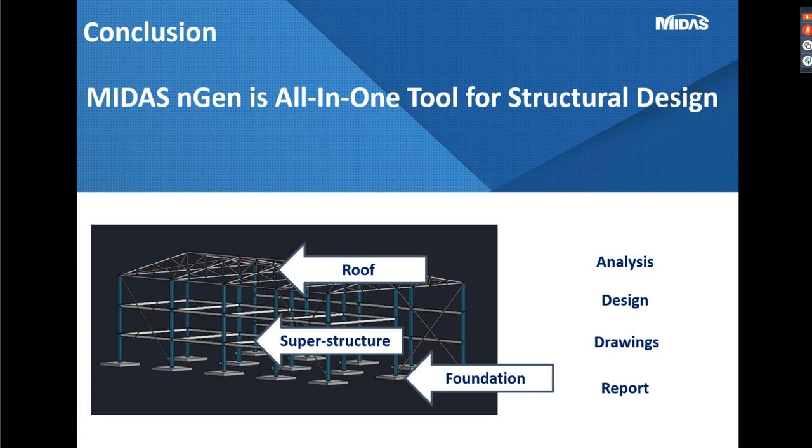Finally, we come to the conclusion that you can actually have a one-stop solution for your roof, superstructure, and foundation. We can perform analysis, design drawings, and also generate reports for all these members in one software solution itself. We can have several types of modeling features as required for your project.

There are several applications for Midas nGen - not just RC, not just steel, but general types of sections. When you can have steel and RC together, modeling becomes easy, so you can see stadiums, shopping complexes, airport terminal structures with irregular shaped roofs, and railway substation structures. These are some RC structural applications and steel structural applications - RC buildings, sorry, steel buildings. Today we saw the steel warehouse, and stadium structures are also applicable.

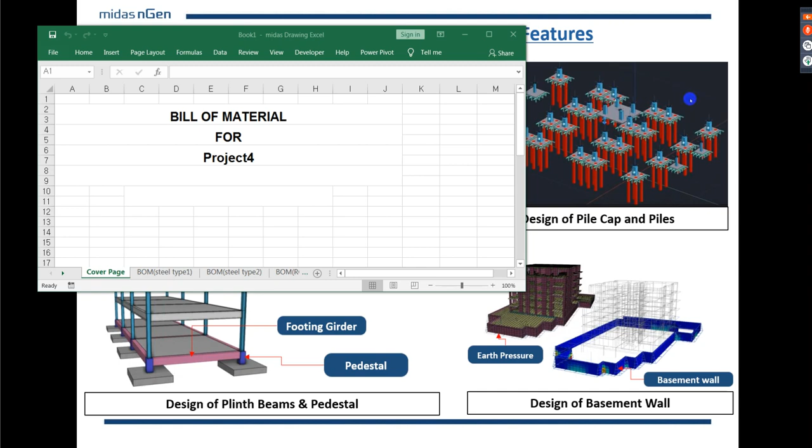And finally, elevated water tanks and transmission towers can also be analyzed and designed. Then we also saw that isolated footings and footing girder pedestals can be modeled in Midas nGen and designed as well, and drawings and bill of material can also be generated. Yeah, it is generated.

So this is our bill of material. For steel, we can see that the section information is given for the different beams, and we can see the quantity, length in meters, unit weight in tons per meter, and the perimeter as well. The perimeter of our section is provided, and outer surface area is also provided, which could be used for painting.

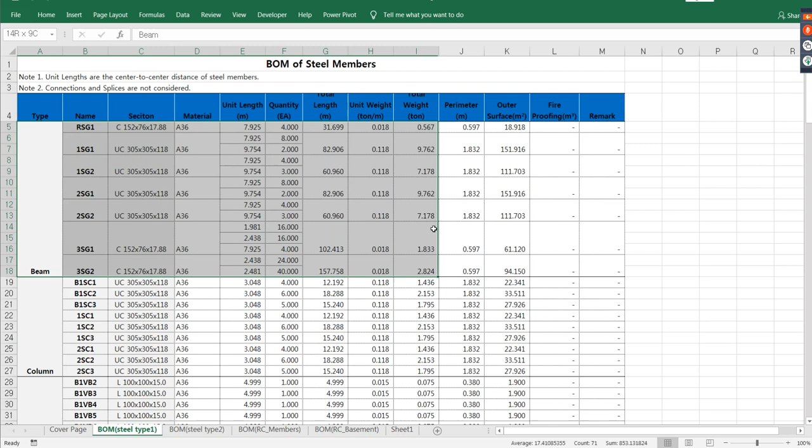And then we have two types of bill of material for steel. This is one with the type information, and then there is another one based on the type as well as other information.

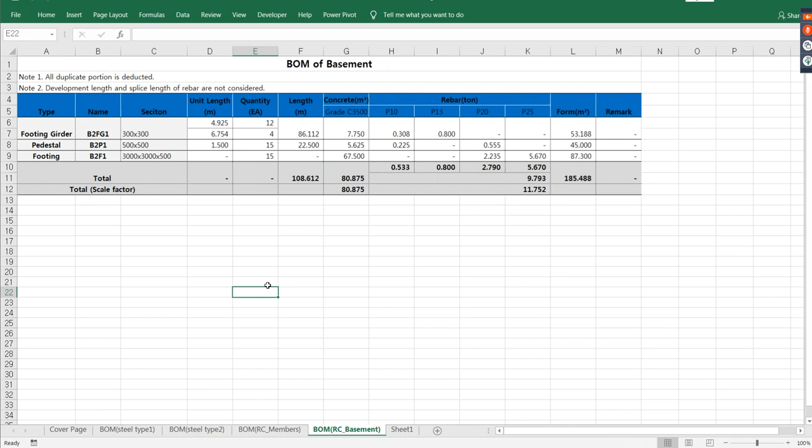And then we have got RC members for slabs separately. And for the basement, we have got footing girder information. So you get the concrete volume in meter cube, rebar in ton, formwork area as well, for footing girder, pedestal, and footings. That's it regarding Midas drawing and bill of material generation.

Okay, so we saw that everything is possible for all types of members. Yesterday we also talked about how we can perform analysis and design for one-way and two-way slabs, and we saw the meshed type of slab analysis and design. Today we saw how we can get the one-way or two-way type of slab analyzed and designed. Then ribbed or waffle slabs can also be analyzed and designed - I can share a video on the same. Flat slab analysis and design is also applicable with drop panels.

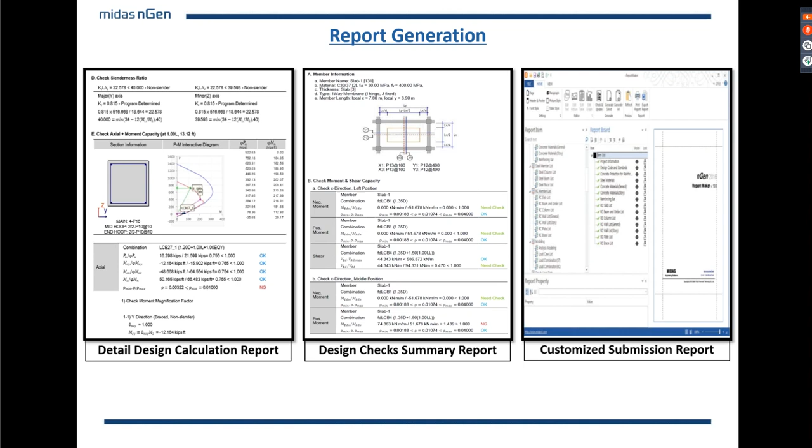Then further, we also saw that a detailed design calculation report is generated in the form of a Word file, and a design check summary is also generated by the program for ready output information. Then there's a customized submission report that can prove very helpful for all your future projects. Then here we have drawing generation and bill of materials in the form of DWG file and Excel file.

Okay, so I hope you enjoyed the information that has been provided. Now let's come to the launch price.

So Midas has a special launch offer for engineers of the Middle East region, wherein you can enjoy all the benefits of the full version of Midas nGen. So whatever was shown, you'll get. It will also include software training and upgrades. As the software is new, it's getting upgraded every year pretty fast, and more features are getting launched in Midas nGen software solution. Right now it covers architectural drawings to structural drawings, including modeling, analysis, design reports, and quantity takeoffs.

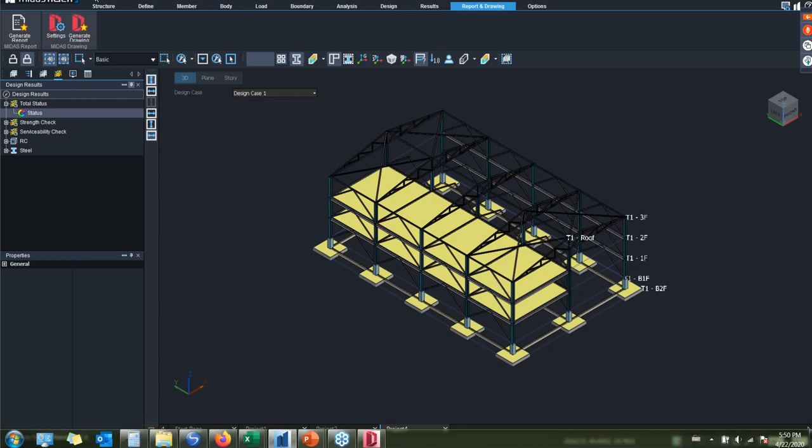Another question, if Russian section is available or not. I'm not sure if any of these is a Russian section, so let me go to the define 1D section. If any of these is a Russian code, then it is applicable.

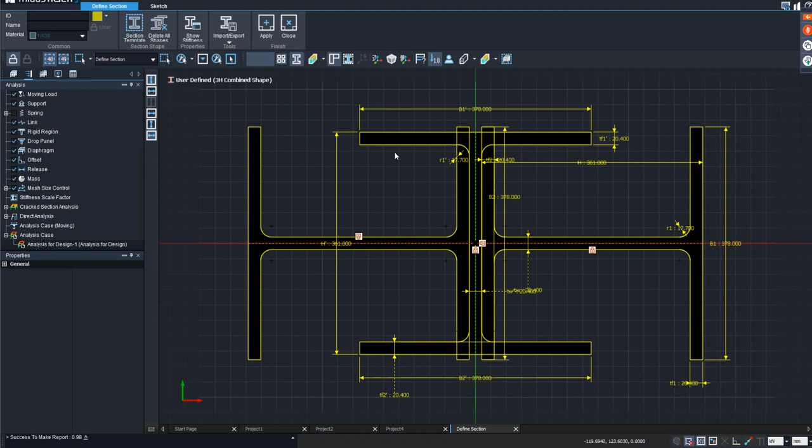If you're into user defined, you can get it for user itself. So you can specify the user defined cross section, or you can sketch your section shape. Or if there is a kind of section shape right over here, and if you're not using this information, you can still do the modification from here directly - for example, making it 300 and changing the sizes at any location.

So this information can be modified and so on, and then you can save it and run the analysis.

Yes, Midas nGen has connection with BIM tools like Tekla, and importing from MGT - as in you can convert your Revit or Tekla files into Midas Gen text file and get it imported over here. You can also have export - export to Tekla is available, you can export to MGT file as well.

We have connection with our geotechnical software solution as well. So you can have the entire steel structure or RC structure imported in Midas GTS NX, which is a geotechnical software solution for performing soil structure interaction.

Plastic analysis and composite sections is not available in Midas nGen.

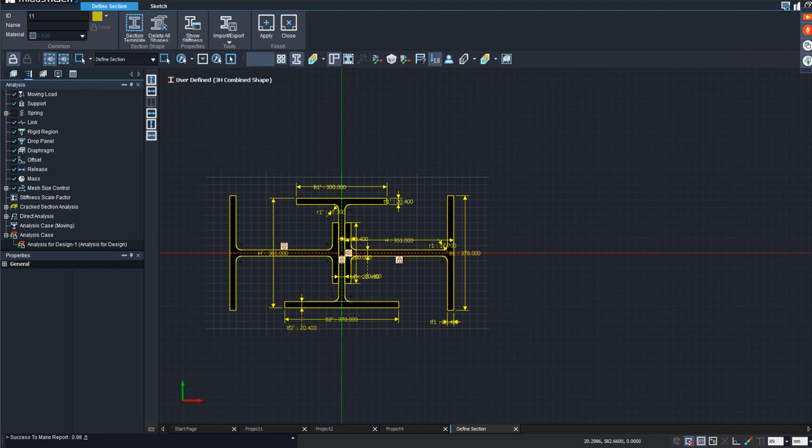Can we design brace for tension force only? Yes, you can actually have the brace type of members as tension-only type of truss elements, so that option is also available. Let me show you - in member brace, there is brace tension only. If you use brace tension only, then the element will only take the tension force, and the design will be based on this force only.

All right, that is it regarding Midas nGen steel structures. There are some more questions - I would like to answer them by email.